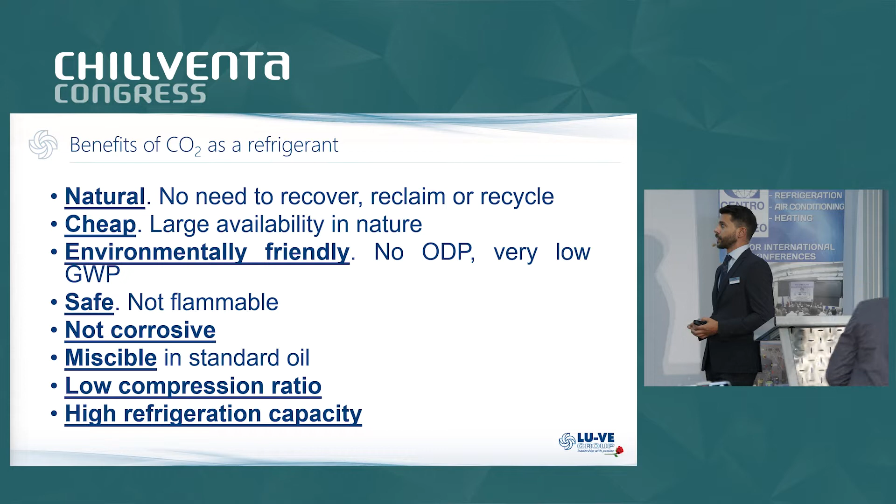Then it's safe. It's a refrigerant that's not flammable. It's not corrosive. It's miscible in standard oil. It has a low compression ratio and it has high refrigeration capacity. So it's a refrigerant that has great characteristics, and thanks to the advances in technology, it has become a great refrigerant.

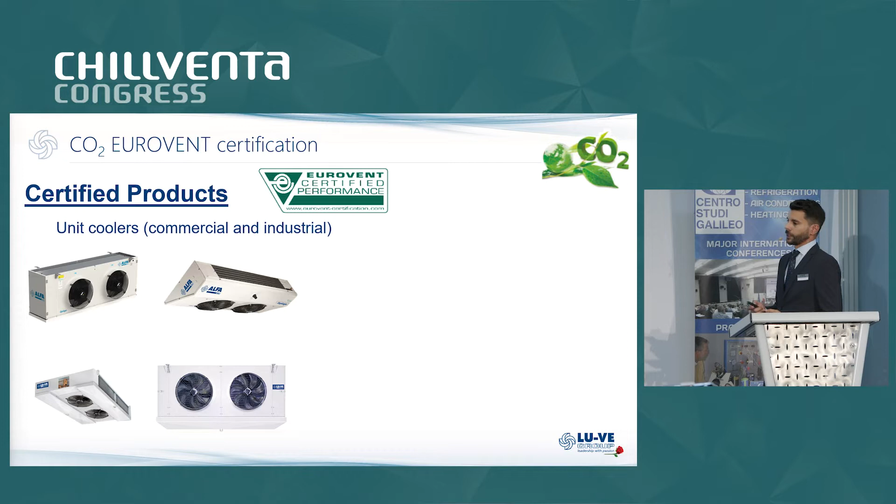So recently the Eurovent certification has been introduced for the high pressure side of the CO2 transcritical system. So all the LU-VE heat exchangers, when it comes to CO2, are Eurovent certified. So both the unit coolers, in their commercial and industrial denomination, and since last week, our gas coolers. We are the first company to have gas coolers that are Eurovent certified.

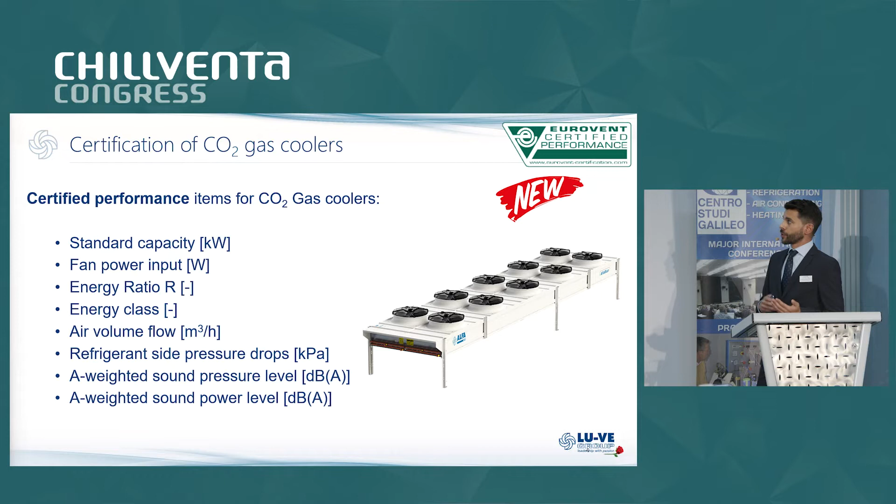What does being Eurovent certified mean? With the Eurovent certification program, what you have certified is the standard capacity of the heat exchanger, the fan power input, the energy ratio, energy class, the air volume flow, the refrigerant side pressure drops, and the noise level. So all our gas coolers since Thursday last week are Eurovent certified.

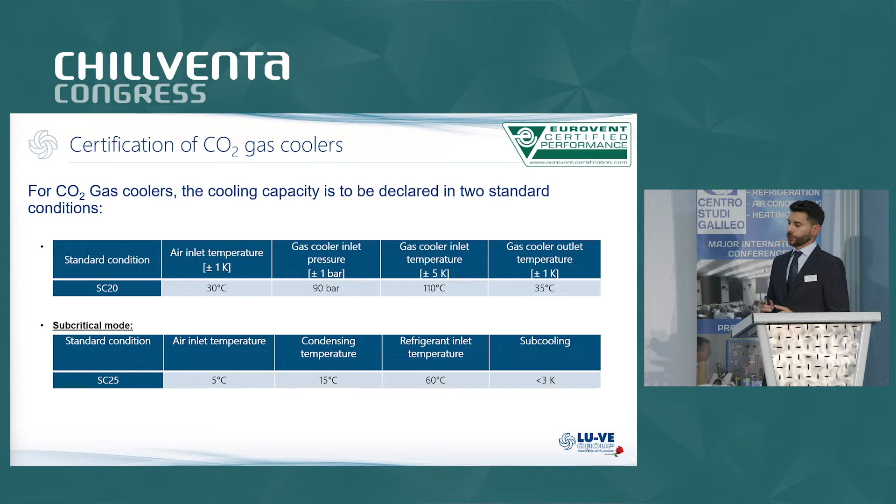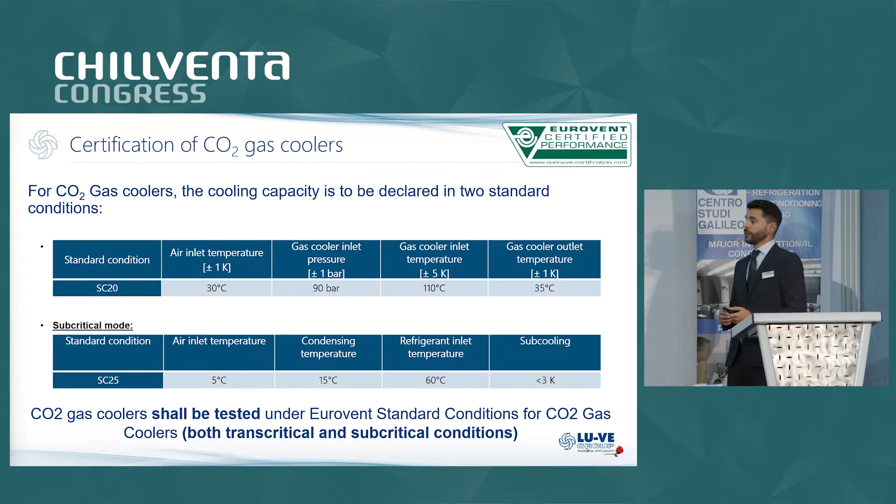When it comes to the Eurovent certification for gas coolers, it basically covers two different working conditions. We have the so-called standard condition SC20 and the standard condition SC25 that basically cover the operating mode in subcritical and transcritical operation. So a CO2 gas cooler should be tested under the Eurovent standard conditions, both in subcritical and transcritical, to get the certification.

In addition to the fact that the units must have their performance tested in both SC20 and SC25, there are other conditions in which the units are verified. In particular, within the Eurovent certification there are some coefficients that make a correlation between the standard conditions in transcritical operation and other conditions that are used to predict the capacity at different operating pressures and different ambient conditions.

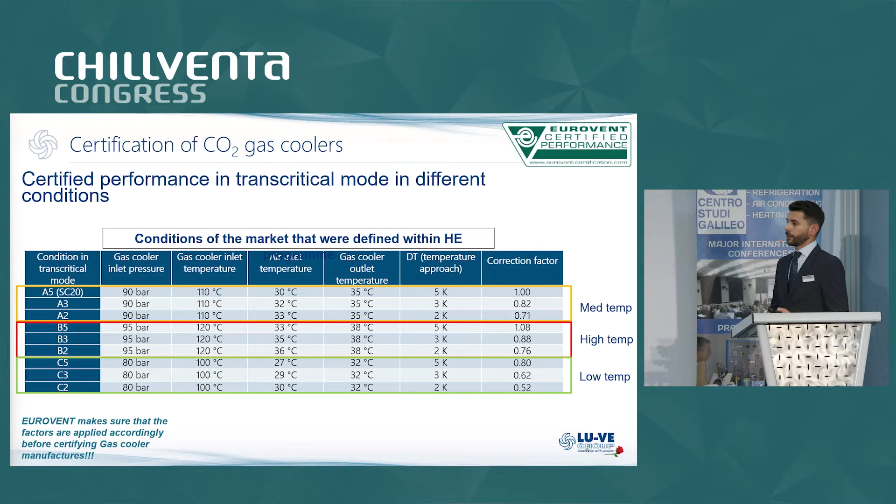So we have three different stages, basically: low temp, high temp, and medium temp with different working pressures. And a gas cooler that is Eurovent certified must be coherent with the correction factors that Eurovent has identified together with the manufacturers. Eurovent makes sure that the factors are applied accordingly before certifying the gas cooler manufacturer. So that's a very important thing.

So what I want to show you is what happens in case you are using a CO2 gas cooler in your refrigeration plant that has a real capacity in the field that is different from the declared capacity. So with the support of our R&D department, I've run a couple of simulations to verify the impact on the annual power consumption, so basically the related cost of running a refrigeration plant.

The assumptions behind the simulations are the following. We have two different temperature levels. We have the medium temperature with suction at -8 and a required capacity of 250 kilowatts. We have a low temperature with -30 suction and a capacity of 100 kilowatts. We have a design ambient temperature for the high pressure side of 35 and a design maximum operating pressure of 95 bar.

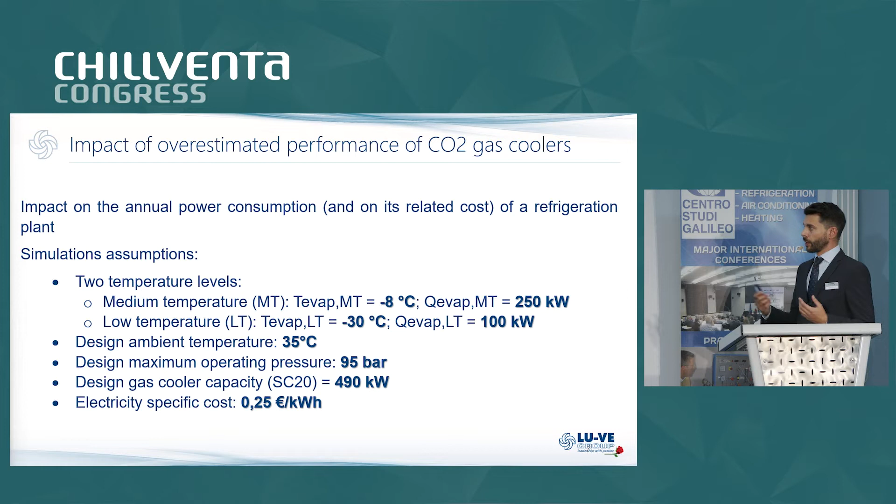The design gas cooler capacity, so the required capacity, is 490 kilowatts, and when we ran the simulation we identified 0.25 as a good number for the cost of energy. Of course, due to the recent situation with the war and everything, the price of energy is much more than that. So the running cost of the system will, of course, increase due to the fact that the cost of electricity is much higher than that.

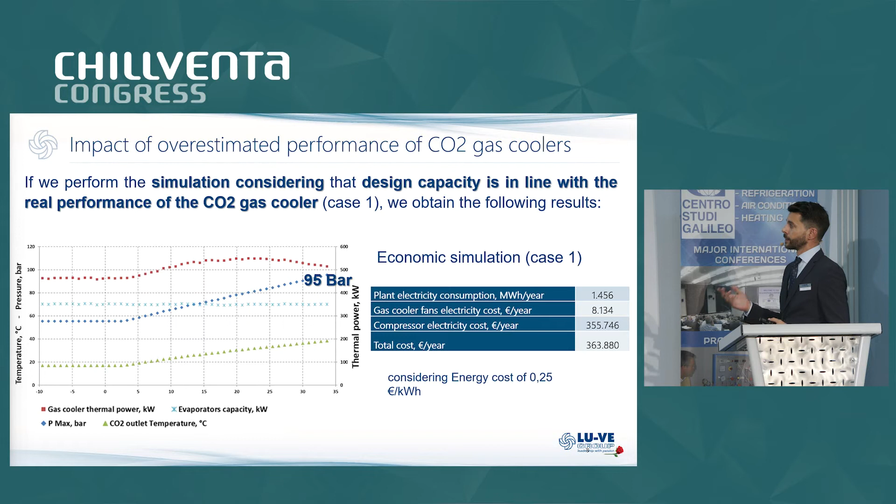We have the economic simulation that demonstrates that the gas cooler fan electricity cost is the least part in the system. So we have 8,134 euros of annual operating cost for the gas cooler itself, but we have 355,000, that's the running cost of the compressors. So in this first case, we have this 363,880 of operating cost of the system. And again, this is considering 0.25 euro per kilowatt hour of energy cost. In this case, the working pressure is 95 bar. Again, we are using a gas cooler that has the real capacity that it has been designed for.

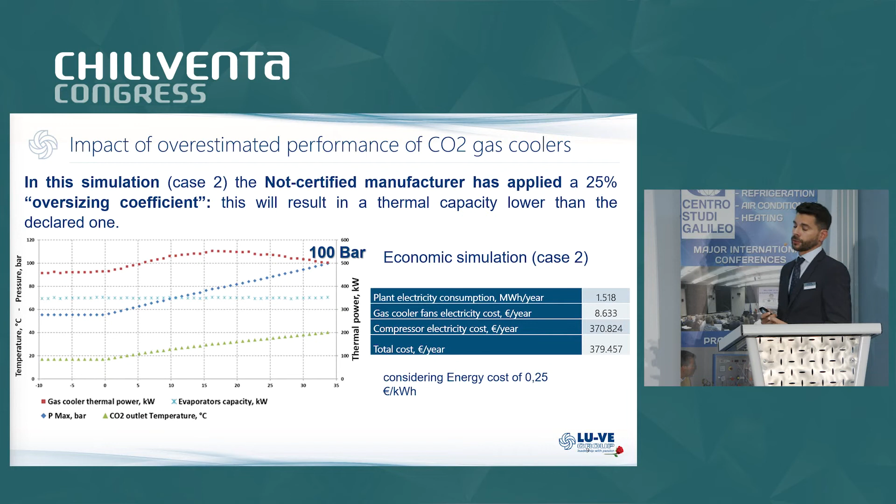In this other simulation, we call it case number 2, we are using a gas cooler from a non-certified manufacturer that is applying 25% of what we call, let's say, oversize coefficient, and we'll see the results with the same working condition that we have seen two slides before. So in this case, we can see that the running cost of the compressors is almost 15,000 euros more than the previous case. And that's because we are running our gas coolers at 100 bar to guarantee the heat rejection that we need at the high pressure side.

So, of course, the compressor rack has to compensate the lack of capacity of the gas cooler to guarantee the effect at the evaporator. This means the compressors have to compress gas at 100 bar, so the discharge pressure will be 5 bar higher than in the design condition. So the system maximum pressure is now almost 5 bar higher than in our design condition, and the impact on the annual cost is not negligible. So we have almost 4.2% more in plant electricity consumption.

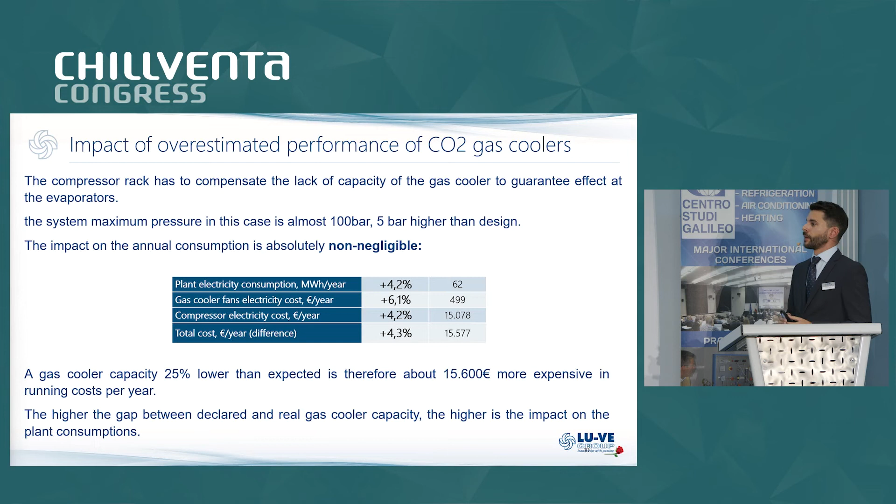That, of course, when we consider that the compressors consume a lot of energy, in this specific case means 15,000 euro per year. But again, this assumption was based on a cost of energy that is 0.25 euro per kilowatt hour. If we consider 0.4 or 0.6, which is the cost of energy in some countries, this difference will be much higher. So, of course, the higher the gap in the declared capacity of the gas cooler, the higher is the impact on the plant consumption. So the gas cooler, being such a key component of the system, must be sized properly, and it's important to have on the field the declared capacity, because otherwise what you will get is a transcritical CO2 system that is not efficient, with, let's say, 4.2% more power consumption than expected.

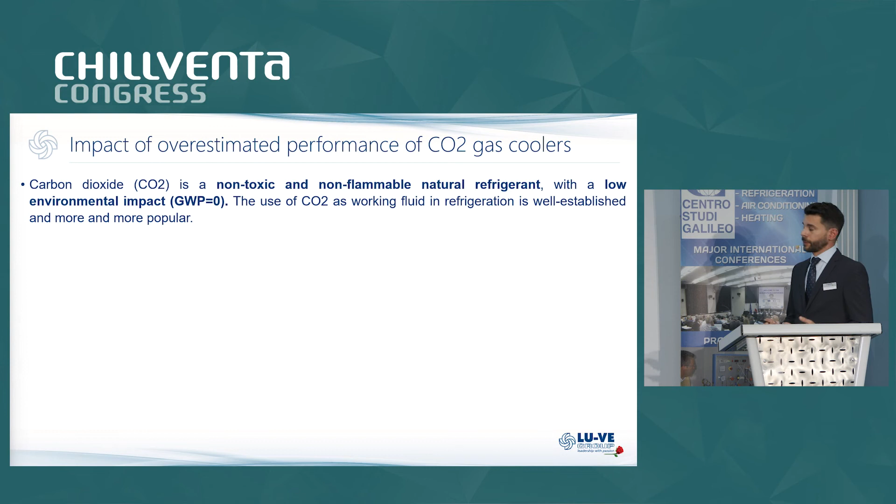So just to sum up, CO2 is a non-toxic, non-flammable natural refrigerant with a low environmental impact, and the use of CO2 as a working fluid in refrigeration is well established and more popular. The Eurovent program for heat exchangers involves the major manufacturers of the market. The program is based on a voluntary approach and certifies the product performance through selection software validation and product testing in a third-party laboratory. So a manufacturer, to be certified, has to have software that is approved and verified, and their units must be tested in a third-party laboratory.

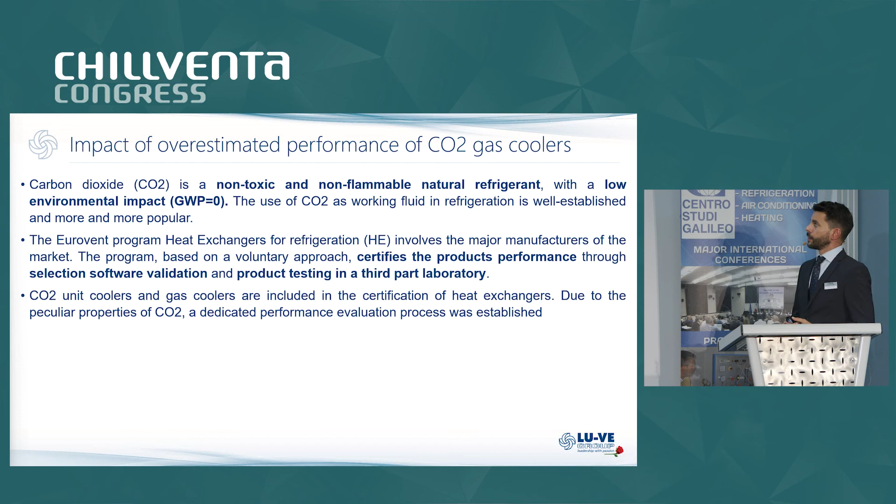CO2 unit coolers and gas coolers are included in the certification, and due to the peculiar properties of CO2, a dedicated performance evaluation process was established. So when comparing with the certification of a standard condenser, we only have one working condition that the Eurovent committee is verifying. When it comes to gas coolers, we have two different working conditions: subcritical, when the heat exchanger operates as a condenser, and transcritical, when it operates as a gas cooler.

And to avoid the installation of a CO2 system being intended only as a greenwashing operation, it's necessary that the components of the plant, including the heat exchangers, are designed and run efficiently. And that's very important because it's not just CO2, it's CO2 that operates properly, and CO2 that operates efficiently, that makes a CO2 system a valid alternative and not just a greenwashing process. So the Eurovent mark is a warranty in this sense, certifying the reliability of the performance of the CO2 unit coolers and the gas coolers. So yeah, with that I'm done.